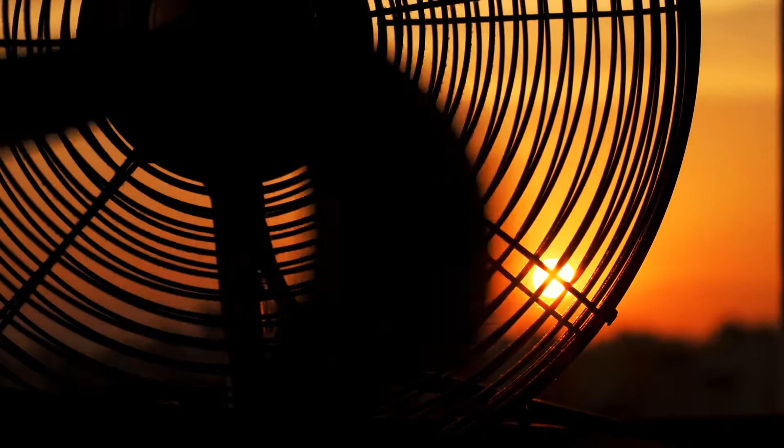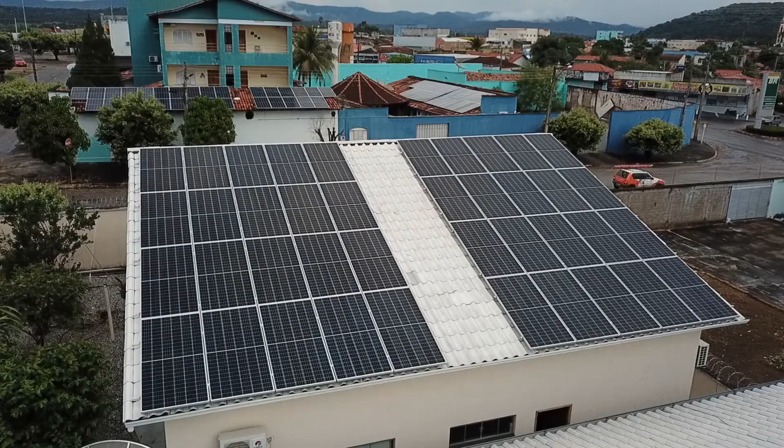However, even if we perfectly aligned renewable energy generation and energy demand, we still need to transmit all that power very long distances, which requires significant investments in the power transmission and distribution infrastructure, and can cause constraints in the power lines. This phenomenon is particularly noticeable in hot and humid climates, where demand for air conditioning in the summer makes electricity prices skyrocket and cause dangerous energy blackouts, like it has happened in the state of California in recent years. So, how much energy we consume is just as important as when and where we consume and generate that energy.

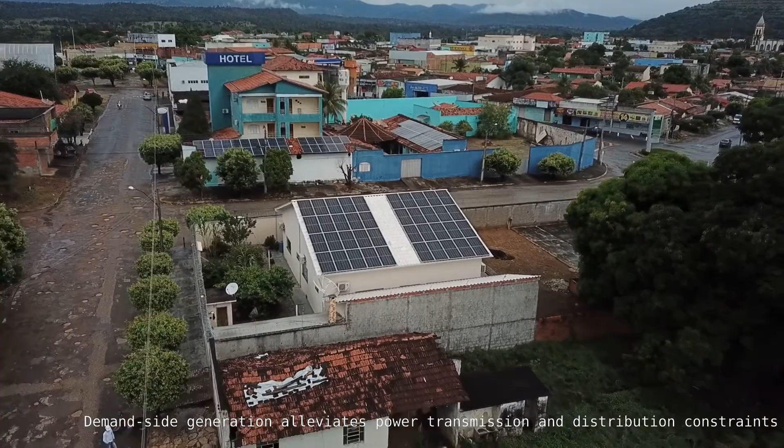Distributed energy generation can help decrease the amount of energy that needs to be transmitted to residential areas, reducing the constraints in transmission power lines, lowering the prices of electricity, and reducing the need for additional investments in the power transmission infrastructure. Despite all these advantages, some distributed energy resources, such as solar energy, can be a source of other problems. Abundant photovoltaic generation during the day reshapes the load profile of many communities by creating multiple peaks and valleys of energy use, which are known as the duck curve.

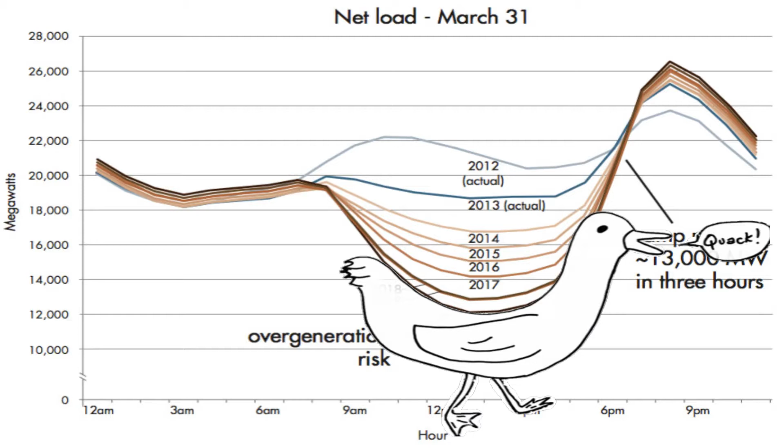The duck curve puts a stress on the power grid by forcing generators to ramp up energy generation very rapidly. This increases the price of electricity and CO2 emissions, as many of the power plants that can ramp up generation very quickly do so by burning natural gas. A possible solution to this problem is to store energy over generation at the distribution level and release it during the peaks of high demand.

The increasing adoption of electric vehicles and other storage devices offers us an important opportunity to better control the demand for electricity. By charging these devices at the right times, and even releasing part of the stored energy back into the power grid, we can flatten the duck curve. There are many different ways in which we can control these energy systems. The traditional approach would be using a rule-based controller, in which the control system will take one or another decision or control action based on different conditions and whether or not they are met.

Other control approaches that are more advanced are the model predictive controller, which will build a model of the system that is going to be controlled, and then run an optimization problem in order to find a close to optimal control policy. The problem with this type of controller is that it's only as good as the model of the system, and therefore if the system under control is changing over time, for example, if we have a neighborhood with many different houses or buildings, and then we start integrating photovoltaic panels or electric vehicles, then this controller would need to be redesigned, and it would no longer work because it's not adaptive. And also it's more expensive because it needs an engineer that starts developing all these models and tuning the controller.

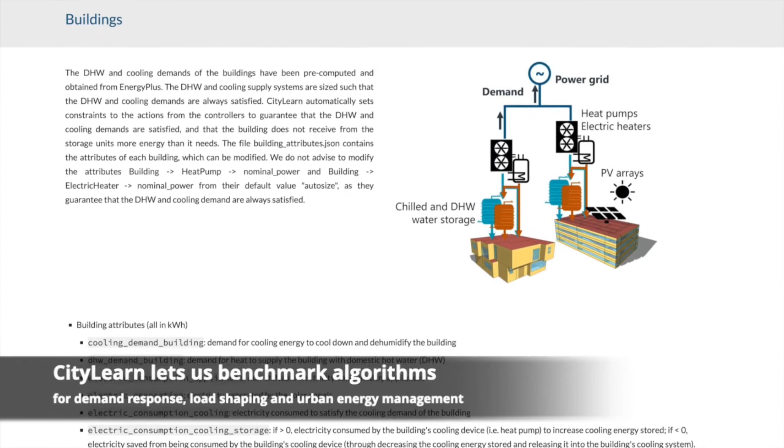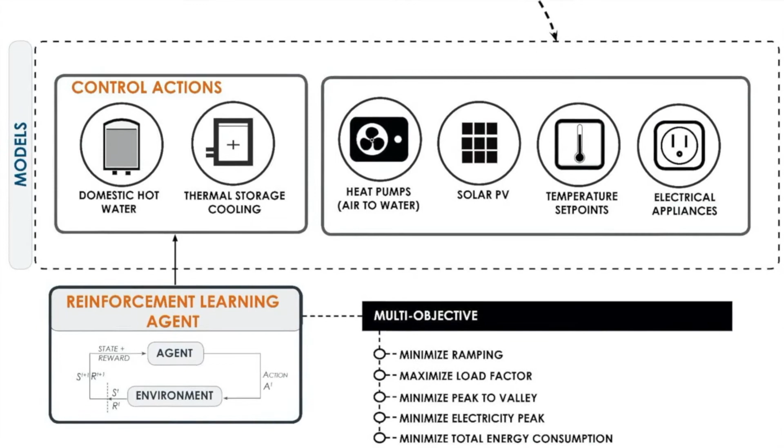In previous research, we created CityLearn, an OpenAI gym environment for the implementation of reinforcement learning for urban energy management and demand response. Now, we use the CityLearn environment to implement our own multi-agent reinforcement learning controller in a simulated scenario of 4 different neighborhoods in different climate zones and different building types.

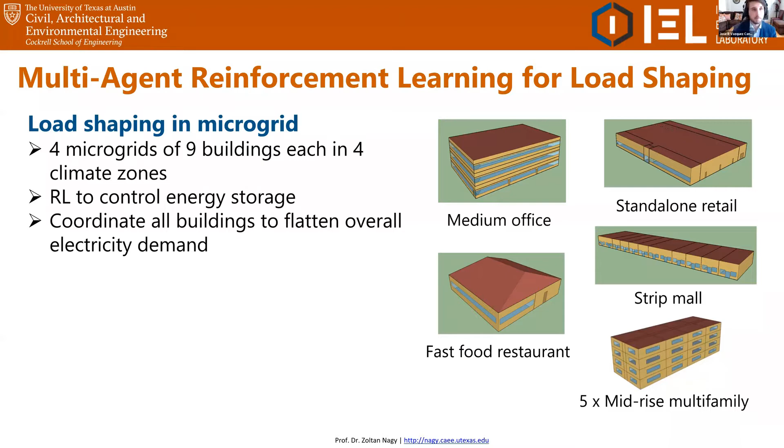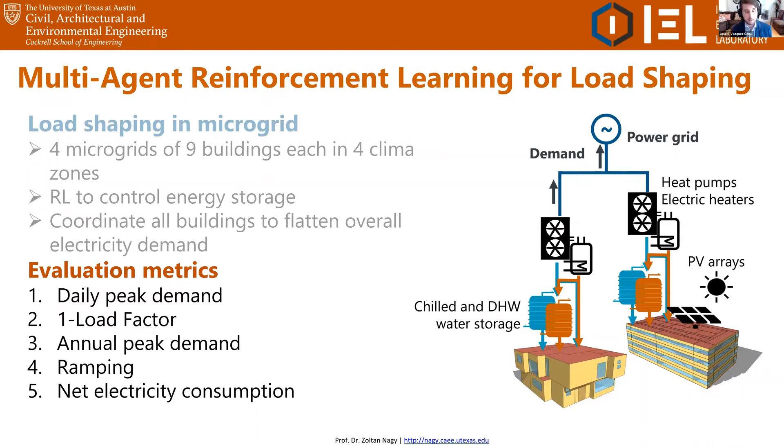We used EnergyPlus prototype buildings to create the different microgrids and use reinforcement learning to coordinate the energy they store in chilled and domestic hot water tanks, with the objective of flattening the overall curve of electricity consumption. Each building had its own reinforcement learning controller that decides the amount of energy that is stored or released by the energy storage devices. At the same time, the storage devices receive thermal energy from heat pumps and electric heaters. To measure the performance of the algorithm, we analyzed 5 different load shaping metrics for a full year.

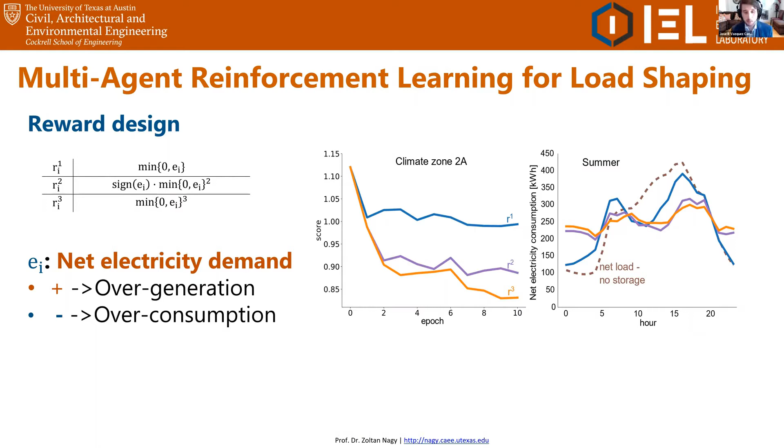To design our load shaping controller, first we had to design the reward function that represents the objective of the controller. In this case, the reward function of each reinforcement learning agent is the net electricity consumption of every building raised to the power of different coefficients. We observe that the higher the exponent coefficient is, the better the performance of the algorithm, up to an optimal coefficient of 3. This type of reward is a single agent reward, since it only depends on the electricity consumption of the building itself and not the electricity consumed by the other buildings.

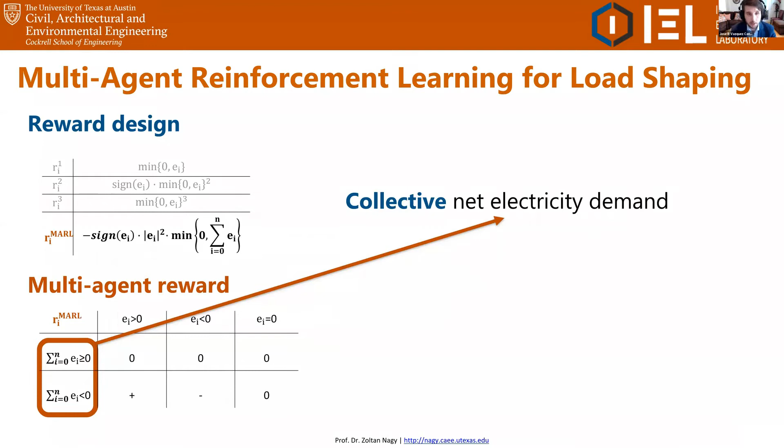To improve the performance of the reward function, we added a collective component to it. We multiplied the square value of the electricity consumption of each building by the net electricity consumption of the entire district. The objective of each agent was both to perform load shaping on its own building and at the district level. After training the controllers for 10 epochs of 1 year, we observed that adding this collective component didn't improve the performance with respect to the single agent reward.

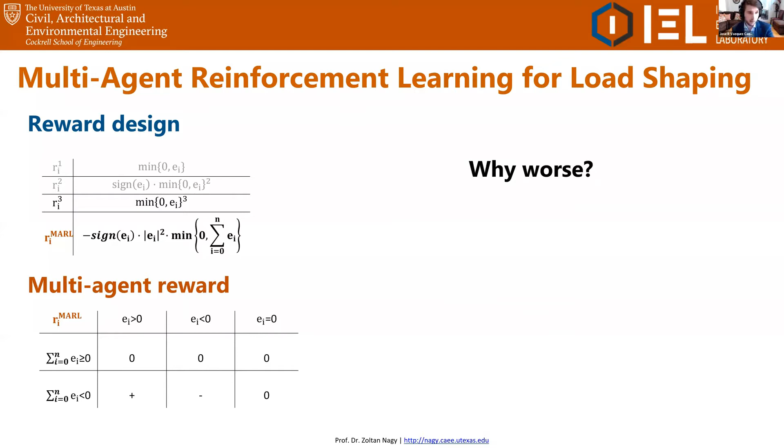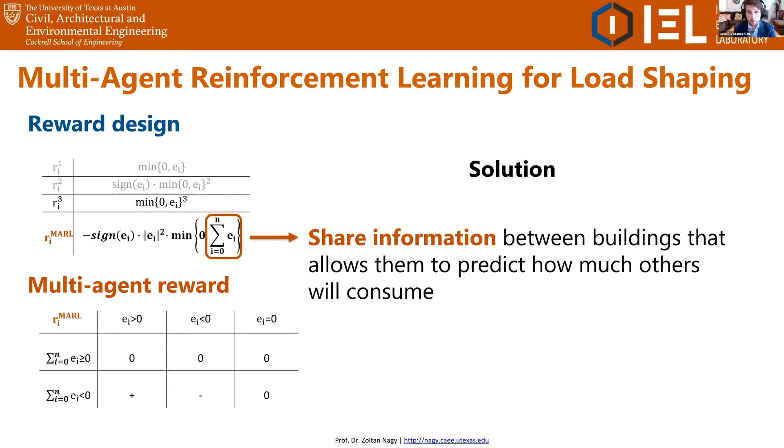The reason behind this is that each reinforcement learning agent didn't have state information about the other buildings in the district. We corrected this by allowing the agents to share predictions of the electricity consumption of their respective buildings with each other, and that's why we developed MARLISA, a multi-agent reinforcement learning algorithm with iterative sequential action selection. MARLISA is built upon the soft actor critic algorithm, a state-of-the-art model-free off-policy reinforcement learning algorithm that can learn from historical data and control systems that have continuous states and actions.

In our MARLISA control framework, each building agent collects data and trains a regression model that predicts its own electricity consumption as a function of some states and the possible actions that the soft actor critic controller can take. Then, MARLISA creates a randomly sorted line of building agents that will select their actions sequentially. The first building in this line selects an action using SAC, predicts what its electricity consumption will be if such action was taken, and shares this prediction with the next building in the line, which uses this prediction as a state variable. This next building then selects an action and predicts its own electricity consumption, which is added to the prediction of the previous building and shared with the next building in the line, and so on.

When the last building in the line selects its action and makes a prediction, the information is shared with the first building in the line, and the process is repeated again iteratively until every building has an estimation of the net electricity consumption of the rest of the district in the following time step. In addition to this prediction variable, buildings also share another variable that represents how far they are in the decision-making line. This whole process happens within the same time step of the simulation, and once MARLISA runs the last iteration and every agent has selected an action, all those actions are taken and the simulation moves to the next time step. Sharing the aggregate predicted electricity consumption ensures that no building in the grid knows how much energy any other building is going to consume.

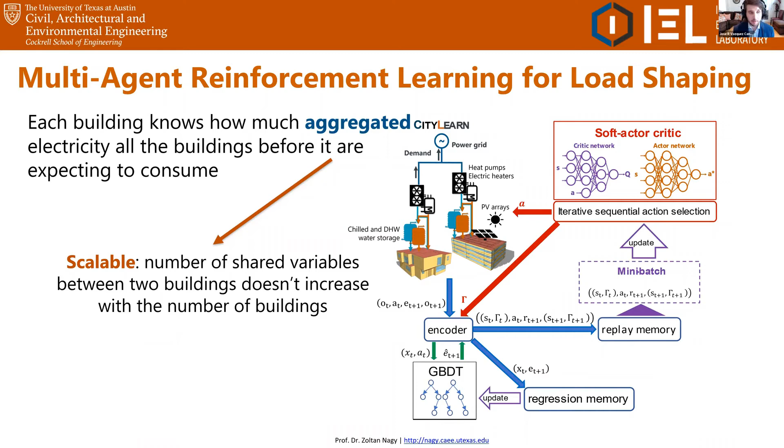The algorithm is also scalable, as the number of shared variables between any two buildings is always constant and does not increase with the number of buildings. When we combine the multi-agent reward with the MARLISA control algorithm, the controllers learn faster and better, improving their performance across the 4 different climate zones where we tested them. The final average daily load profiles show how the algorithm successfully flattened the duck curve by properly coordinating the energy storage in the different buildings.

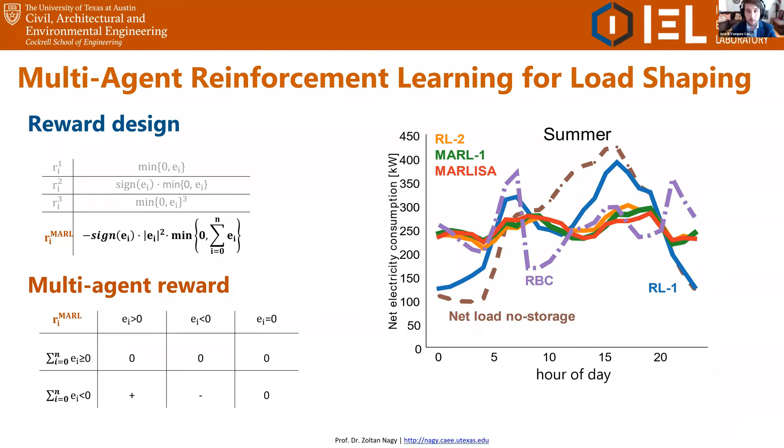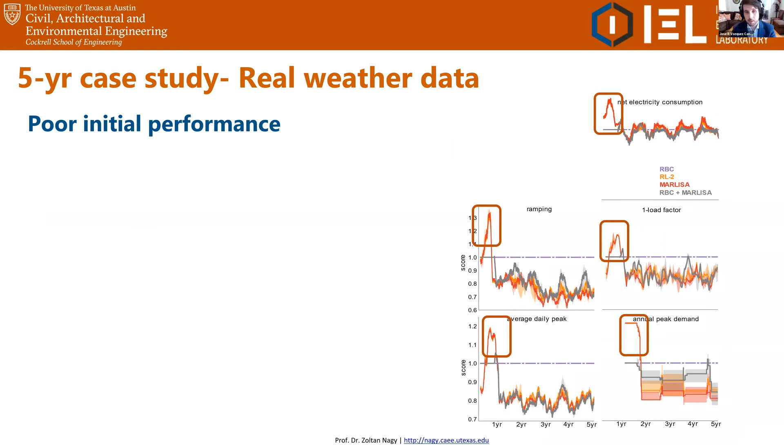These results we've shown so far were obtained by training the algorithm across many epochs using the same simulated data, which is not something we can do in real-life situations. That's why we also evaluated the performance of our controller in a 5-year case study in the same type of district. In order to learn, reinforcement learning needs to take exploratory actions at first and improve its performance over time. Therefore, it is critical to analyze how long it takes until the algorithm starts to perform well. Our results show how MARLISA was able to outperform our baseline rule-based controller after only a year of training. And we were able to improve the performance during the exploration phase by using the rule-based controller itself to perform the exploration instead of doing random exploration. This slightly decreased the long-term performance of the controller, but greatly improved the short-term performance.

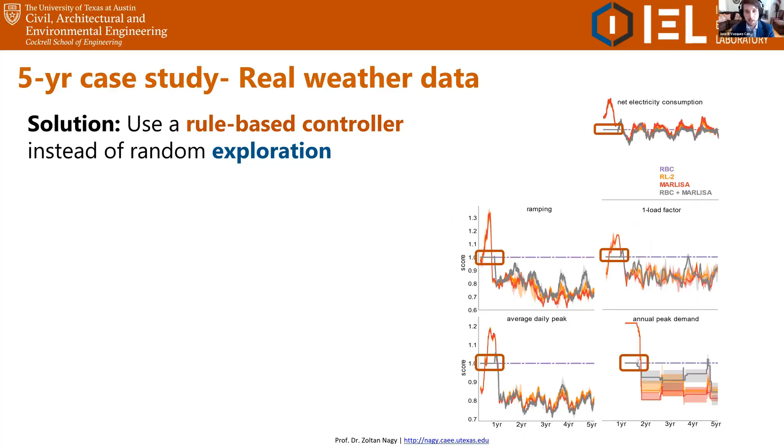In conclusion, it's becoming increasingly important to control the energy that we store and consume, and the adoption of electric vehicles and other types of storage devices is only going to accelerate this trend. In this paper, we have focused on introducing a reinforcement learning controller called MARLISA, which focuses on coordinating different residential agents and how we can store energy in a way that we flatten the overall curve of electricity consumption. Reinforcement learning, as we mentioned, has many advantages because of its adaptability, its ability to learn from historical data, and also because it's model-free, which makes it much more cost-effective for its implementation in residential areas.

We implemented our reinforcement learning algorithm into CityLearn, which is a reinforcement learning OpenAI Gym environment that we have developed for the implementation of reinforcement learning for urban energy management.